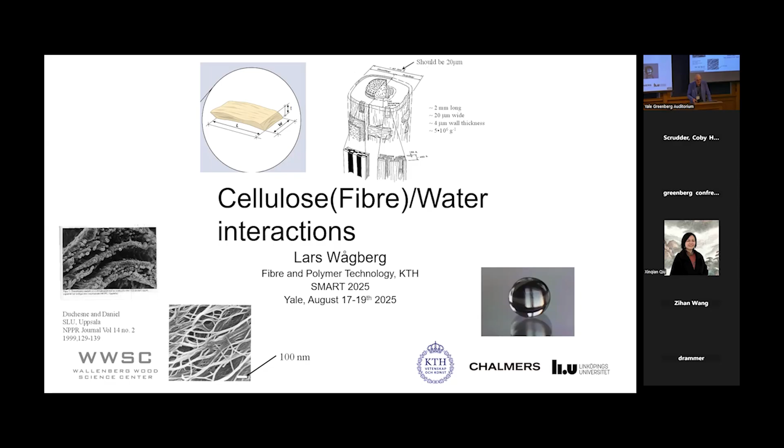And also we'll hope to spend some time on models and the swelling of model materials of cellulose. This is a regenerated cellulose bead that we have used for studies to find out what happens when you drop cellulose in water, when you immerse it in water.

So, starting with the facts that we have, the interactions are necessary for plants. Cellulose-water interactions are necessary. They are necessary for paper making, for hygiene products and absorption materials. They're negative for the strength in moist environments, both for wood and more so for papers.

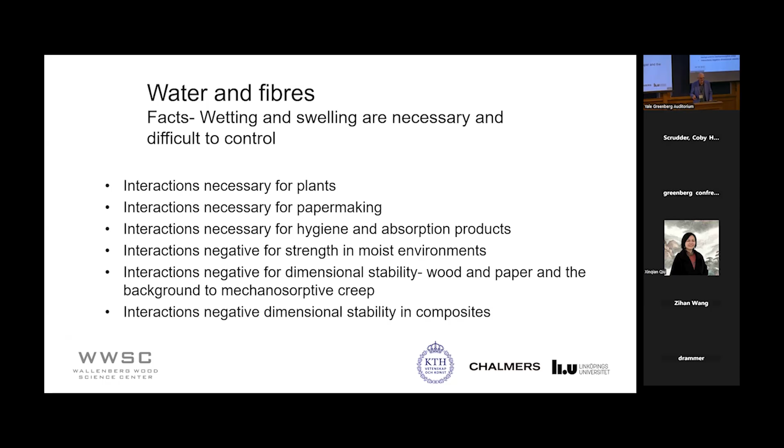Dimensional stability is a large issue. Of course, when moisture absorbs, you know that in composites that are not water resistant, they do swell and they cause a lot of problems. And dimensional stability is also another problem of the water. So the water is there, water is important, and the interaction is really important.

And the form of water is important. So are we talking about vaporized water, or are we talking about water in the condensed state? It's a very big difference. So this will be a combination of lecturing, and I hope you can take that. It's well meant, and it's also giving some own results.

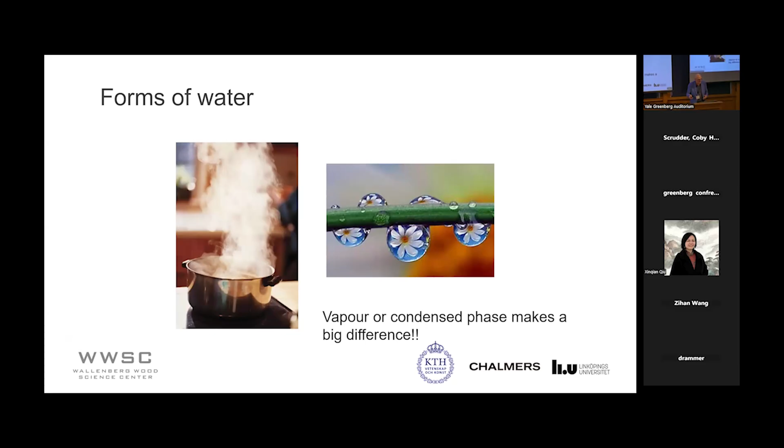But let's start by lecturing, and that is the driving forces behind moisture adsorption to cellulose and fibers. People might find this as an academic battle, but it's not. It's a fundamentals that is important.

And then factors controlling the swelling of cellulose when you drop it in water. And then also the state of water at the cellulose-water interface, some modeling work by others and some high-resolution measurements that we have done ourselves. And then what happens if you remove the last water from the cellulose?

These two last bullets have been catching our attention lately because they are important. The last layers are important, and they mean a lot for the properties of the materials that we have.

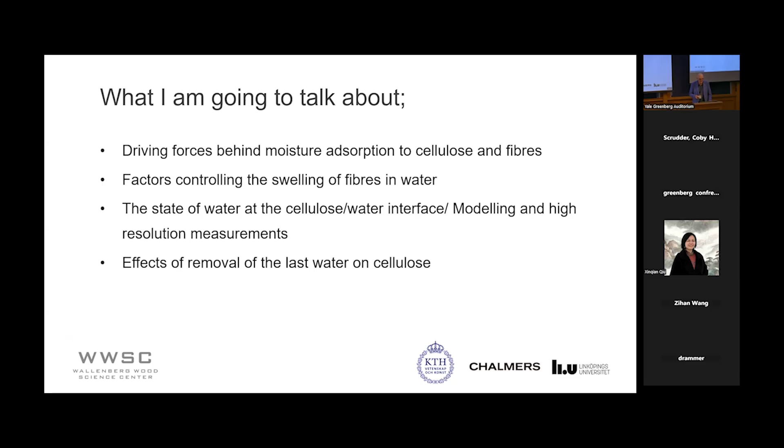So why and how does water adsorb? Well, let's start by saying that it's an enthalpy gain that is a driving force, nothing else. It's the enthalpy gain when moisture absorbs to cellulose or to wood. And how can you study this? Well, it's the free energy of the interaction. You have the enthalpy and the entropy.

And of course, when water molecules are leaving the gas phase and depositing on the surface, they are releasing the heat of evaporation, and they're having the interaction enthalpy with the surface. Of course, they lose entropy. They're much more joyful to be out here than to sitting next to each other at the surface. So you lose entropy. And this has been studied over the years.

Professor Ishimaru mentioned that we had both read a paper from 1952 or something by Morrison, but there is also some other recent papers by Hollenbeck that is very pedagogically written, and they combined calorimetry and moisture adsorption, and by doing this you can sort out both the enthalpy and the entropy contribution for the moisture absorption. And I can really recommend it.

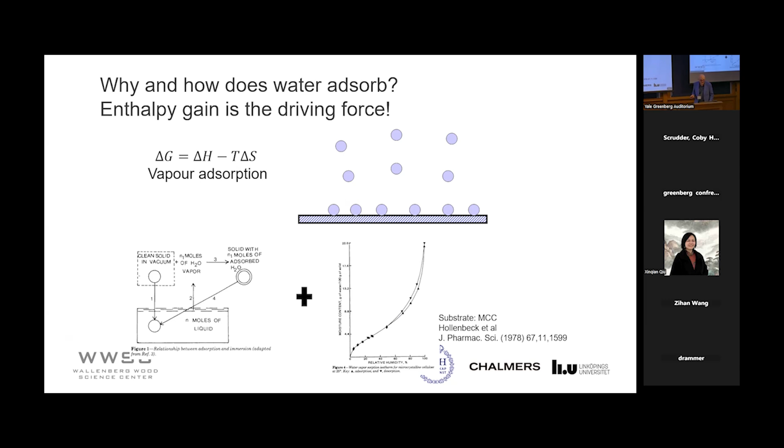It's nice reading. And what they find is that what you see here is the cumulative part at different moisture absorption, and you see that the free energy is increasing. And the initial part is steeper, the gain or the release of heat is larger in the beginning than it is at the end of the absorption isotherm. And if you look, this is the cumulative one, and this is a differential part.

So you see that up to a monolayer formation at the surface, this is from microcrystalline cellulose, there's a constant enthalpy change. And then as you pack more and more water there, you don't get as high an enthalpy change. And you also see that the entropy loss is largest in the beginning. And this is the driving force.

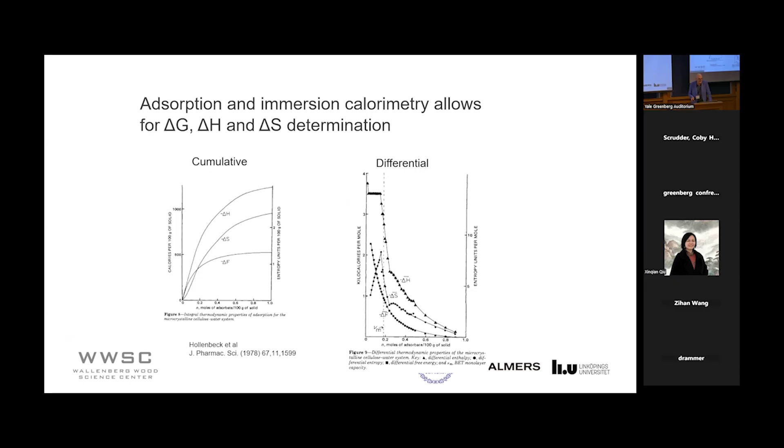So it's not the hydrogen bonding that is driving the absorption to cellulose, that's the fact. And there's also an interesting part, and that's adsorption hysteresis. It's revealed both by absorption and calorimetry. So this is the data from absorption, and this is the desorption part.

The reasons for this might be many, but their conclusion is that it's both enthalpy and entropy causes. So the material might change during the moisturizing of the cellulose, and this has been discussed by many others as well. But for the microcrystalline cellulose, the hysteresis is caused both by enthalpy and entropy upon absorption, not by swelling.

And if you have fibers instead of MCC, the situation might be a bit different. So what do we learn? Well, the enthalpy gain is the driving force for getting moisture onto cellulose. The absolute values can then be correlated to hydrogen bonding, of course, once the molecules are at the surface.

And the surfaces are uniform. It's not specific site absorption. So they do absorb at the surface, but they just absorb, and then they can find their final positions. There is no specific binding sites according to this work. And I think Morrison says the same thing. And for this reason, we don't have any swelling.

At earlier times, use of calorimetry and absorption was tiring, and you had to build special equipment. Today, we don't have that excuse. We need money to buy the equipment, but there are excellent equipment allowing us to do these measurements today. So this is, I think, important. If we modify materials, we can study these details, and we should study these details.

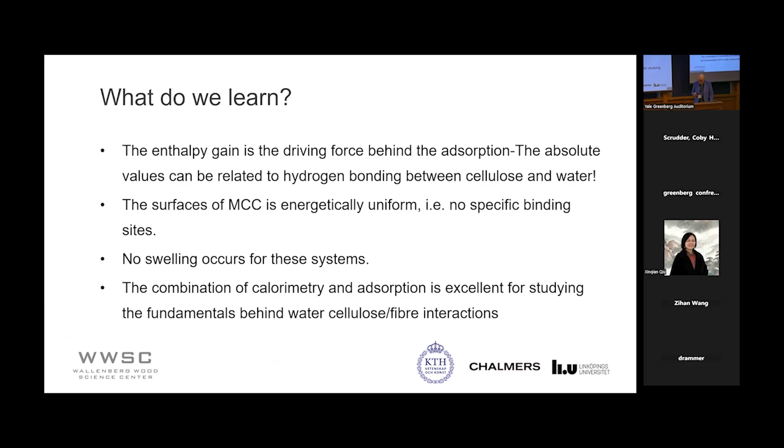So what does this mean? Well, Lars showed some images of fibril and fibril aggregates. And I also showed some data from Geoff Daniel on my initial slide. But there's also a model that has been introduced. And we're talking about fibrils and fibril aggregates. We try to teach that. We don't have protofibrils and microfibrils and so on, but we have fibril aggregates.

But if you say that we have fibrils that are 4 by 4 nanometers and all the surfaces are available, you can calculate the specific surface area for a cellulose material, and that would be for pure cellulose around 667 square meters per gram. And if you then assume a monolayer coverage of water molecules, you end up with 0.33 grams of water per gram of cellulose, which is amazing.

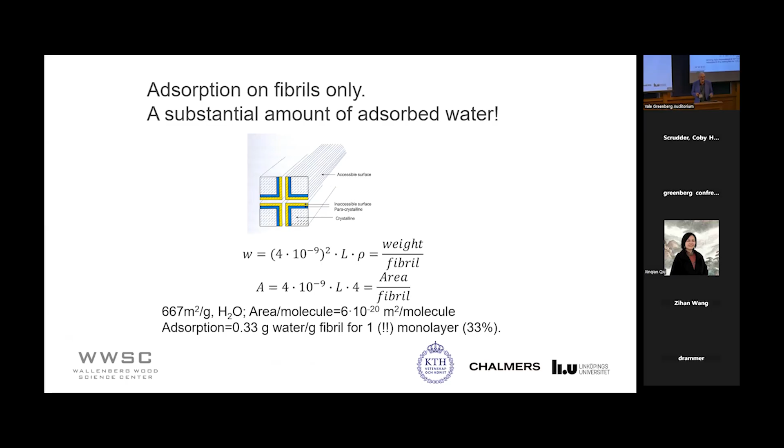And then that covers the surface. I don't use any close packing or something like that. So this is what it brings to, and just a monolayer leads to this amount of water. This is the back of the envelope calculation, of course.

And then we say that what is driving the swelling here is the pure polyelectrolyte type of swelling. So we have the free energy of swelling as the combination of the mixing term with water and cellulose, the influence by ions, and then you have the withholding forces by the network in the fiber structure. So how can we determine this?

Well, for fibers, it's a nightmare, of course. There are so many fibers, a couple of million fibers per gram in the lignified wood, and also they are basically all different.

So what we have done is that we have developed a method where we regenerate cellulose. We take fibers that we have carefully characterized and modified, we dissolve them, and we precipitate them under controlled conditions, and we get these astonishing beads, which I'm very happy about. I looked for this kind of material for 10 years, and now we found that we can use cellulose to get these beads.

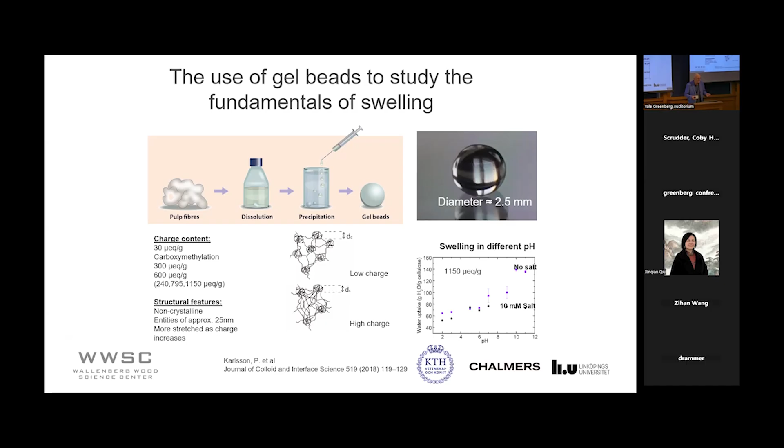We have looked at the swelling, and we see that the swelling follows: when you increase the pH, you are dissociating the carboxyl groups, and you get an increase in swelling. It behaves basically as fibers do, but exaggerated, because fibers don't swell this much.

And then we have these three terms: the mixing term, the ion term, and the deformation term. The ion term is rather easy. We know the charges, and we can estimate them from a simple osmotic pressure calculation like this.

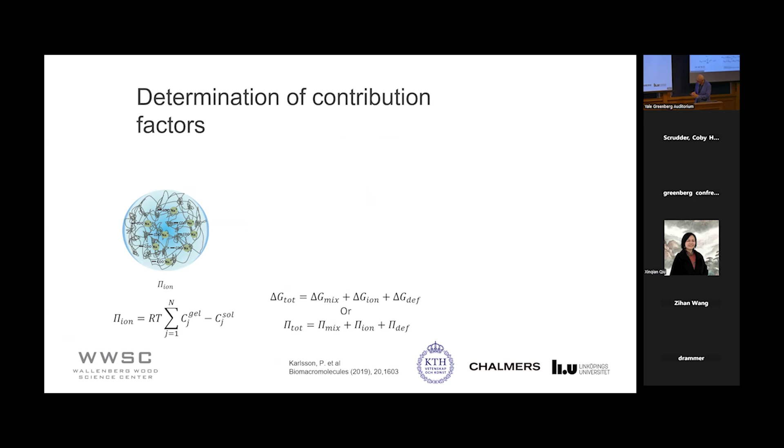Then we use Flory-Huggins theory to estimate the mixing term, where we naturally have the interaction term, the chi parameter, and phi is the volume fraction. Then we have the network term holding these materials together, as in the fiber wall.

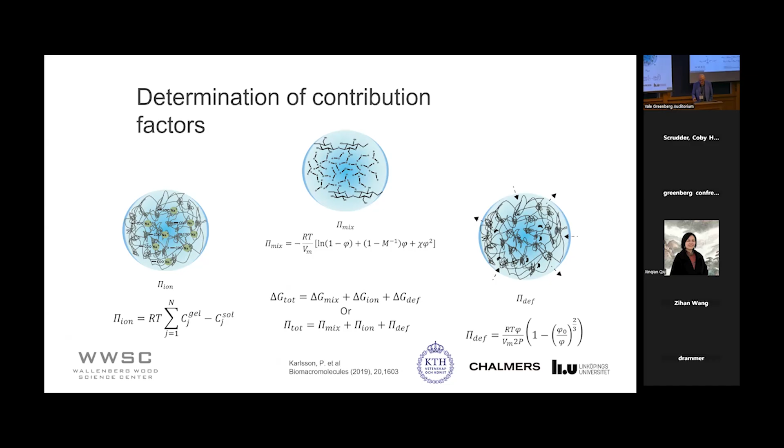But this is, of course, very difficult. So how we solve the problem is by estimating the chi parameter from Flory-Huggins theory, theoretically, and then we determine the influence of charges to get the ionic term. Then we determine the swelling under different osmotic stresses, which means we put polymers outside the bead and see how they deswell. So then we have three known, and just the network term left, which we can calculate.

There you see we have the influence of the different volume fractions here. We see that the mixing term, as you increase the volume fraction of cellulose, becomes more important, and then you have the deformation term. The ionic term turns out to be much more important at lower volume fractions.

Is this important for fibers? Is this something that shows for fibers? Well, I've added the term here. This is how much a fiber swells, the lignified fiber in water. And you see that yes, all these terms can play a big role in the swelling of fibers when you dump them into water.

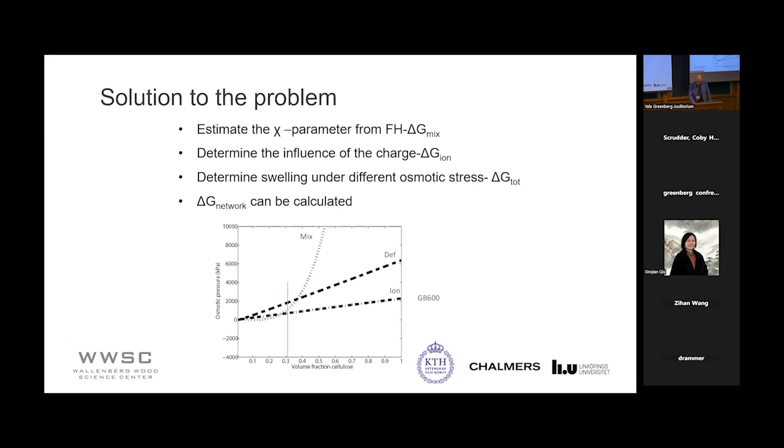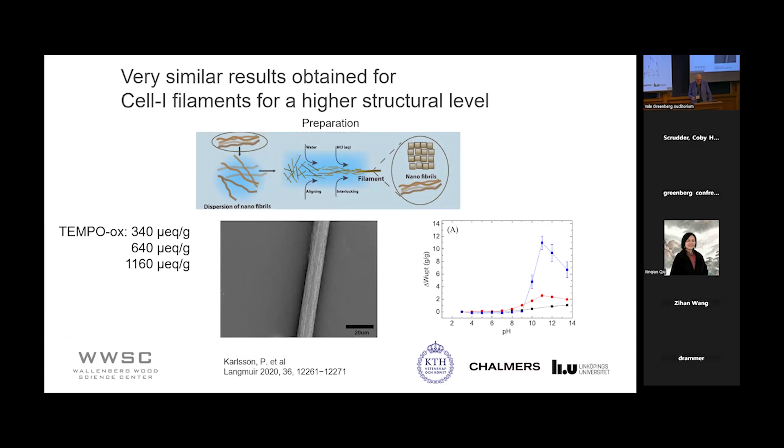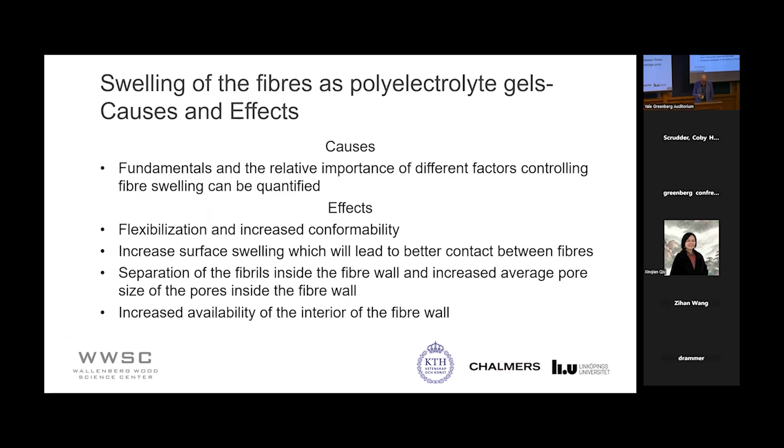Then there's the state of the water around fibers in the fiber wall, and that has been a question for many years. So how is the mobility of the water molecules affected in the fiber wall? I wanted to highlight a number of studies - here's where the water is.

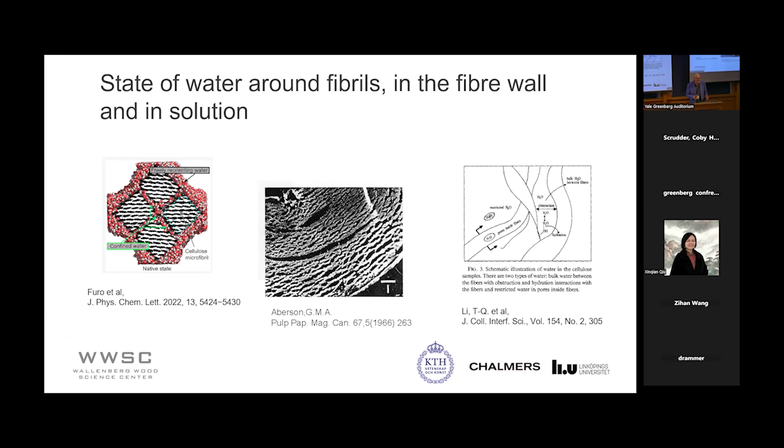Lars Ödberg and Tie-Qiang Li used relaxation NMR to see how water molecules relax - whether they are on the surface, a bit from the surface, or in the bulk - and how the movements change. Lars Berglund, together with Istvan Furó and Jakob Wohlert, also did modeling of water around a fibril bundle like this, the fibril aggregate, where you have internal surfaces and external water. What we can learn from the work by Tie-Qiang Li and Lars Ödberg is that you have different kinds of relaxation times.

The tau F is the relaxation time of adsorbed water. The tau S is the relaxation time of water molecules diffusing between fibrils. And then the free relaxation time of water at 25 degrees Celsius is 2.4 picoseconds.

So you see that the adsorbed water has decreased relaxation, or they are relaxing slower. And you also see that the water molecules hindered from diffusing inside the fiber wall are really slow. We're talking about nanoseconds and picoseconds.

And they also found, which is important, that there are 1 to 2 layers of water that are affected by the surface.

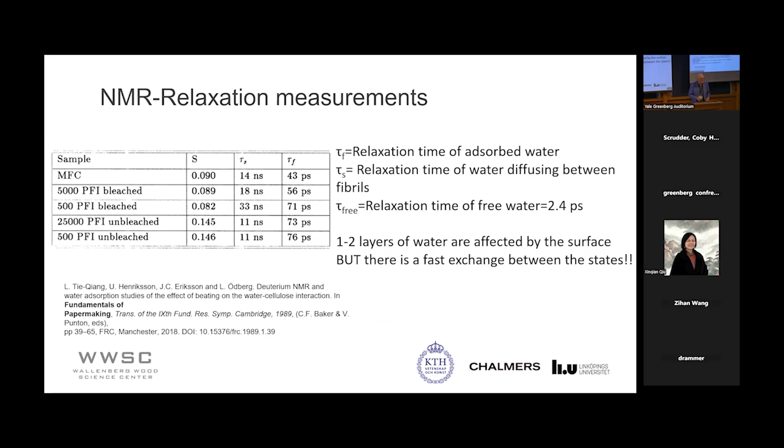This work by Lars and Istvan is really enlightening, because they also modeled this with molecular dynamic simulations, and they see that in this fibril aggregate you have availability for water molecules, but there are very tiny adsorbed layers, and then free water molecules outside, with a quick exchange between these layers.

So there is a change in movement of the water molecules tied close to the cellulose surface, and also a fast exchange between these different states. Otherwise, they would show up in scattering, for instance. So they are changing fast, they are slower, but they are exchanging.

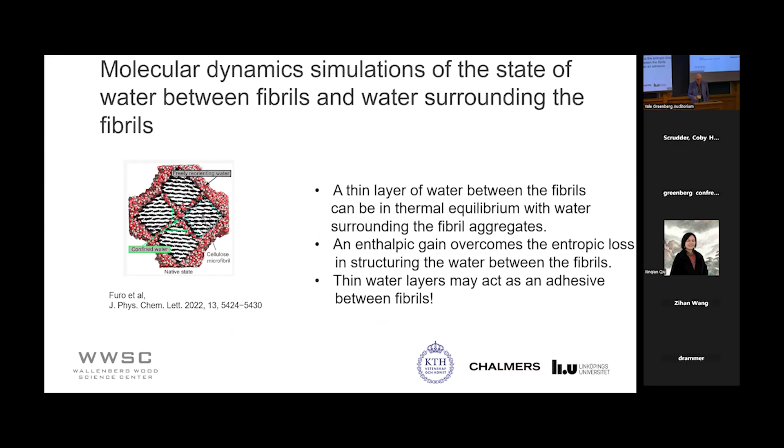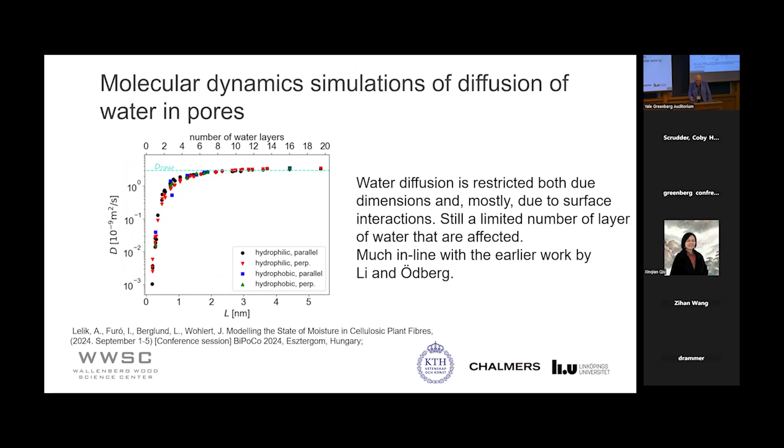This has also been shown recently by Jakob and his PhD student Alice Lelik. They see a change in mobility—this is on a logarithmic scale—a change of mobility inside a pore like this, and you also see the number of water layers outside. So the conclusion is much in line with the earlier work by Ödberg and Tie-Qiang Li, but it also shows the power of this kind of modeling when you're asking the right questions.

Lately, the drying of water molecules from the surface has also been studied by Igor Zozoulenko and his group, together with Lennart Bergstrom at Stockholm University. They have been checking how easy it is to remove water molecules from fibril or fibril aggregates, fibril bundles, when decreasing the pressure outside.

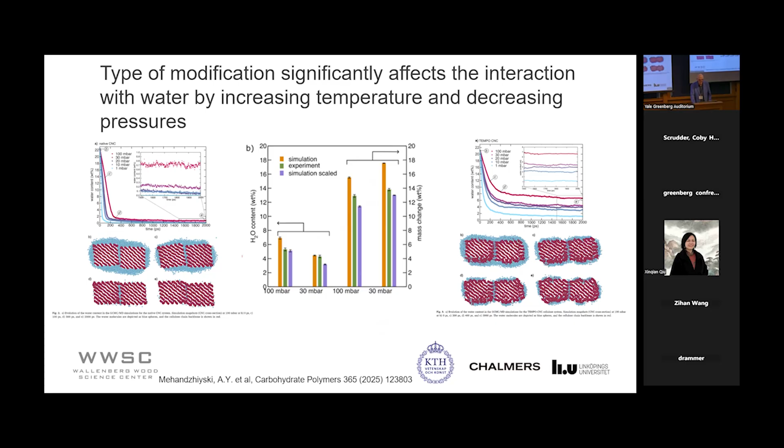You see that for non-modified, or for these sulfonated fibrils, you can remove basically all the water. But for tempo oxidized fibrils, it's very difficult to remove the last water. So the type of modification will also influence how tightly these molecules sit at the interface.

So very quickly, I'd like to show you what happens when removing the last water. This is from cellulose nanofibril sheets—we make sheets from nanofibrils, dry them, and then change them to different counter ions, since these are charged and contain carboxyl groups. Then we heat them for different times and check their reswelling.

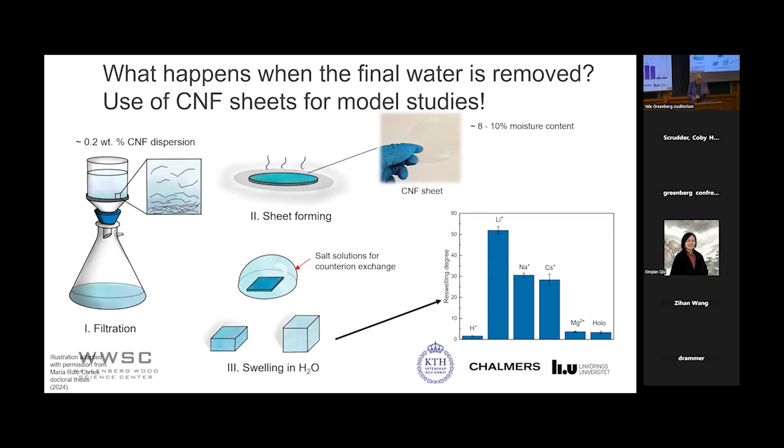We measure the reswelling as a function of the counter ion content, and we see that monovalent ions and multivalent ions play a very big role. Holocellulose is also something from Lars Berglund's group—we show that these are not modified, but they don't hornify to the same extent as others.

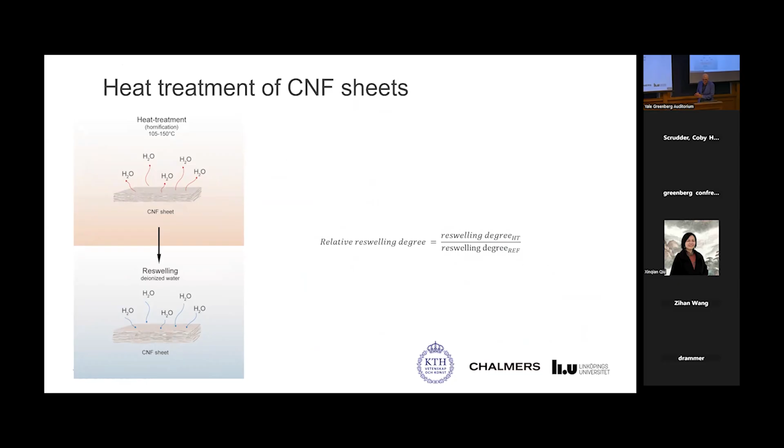So this is what we do, a more schematic treatment, and then we measure the reswelling degree. Then we see, when we heat treat—this is the message.

So when we heat treat the sheets from 105 to 150 degrees, the swelling decreases, and there's a limit around 130 degrees. After 130 degrees, we see a rapid decrease in reswelling, and also the counter ions play a big role.

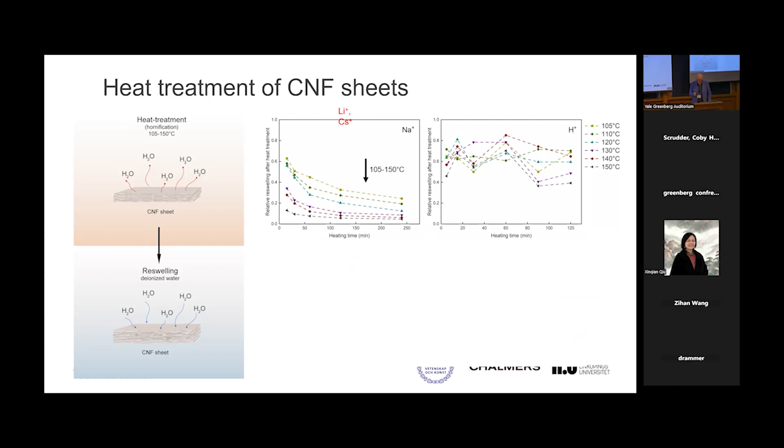But I'll rush through this a bit. If you dry it in the protonated form, we don't see the big influence of the heat treatment, but we do see a hornification when we put them down in water again. So I'll skip a couple of slides and move on.

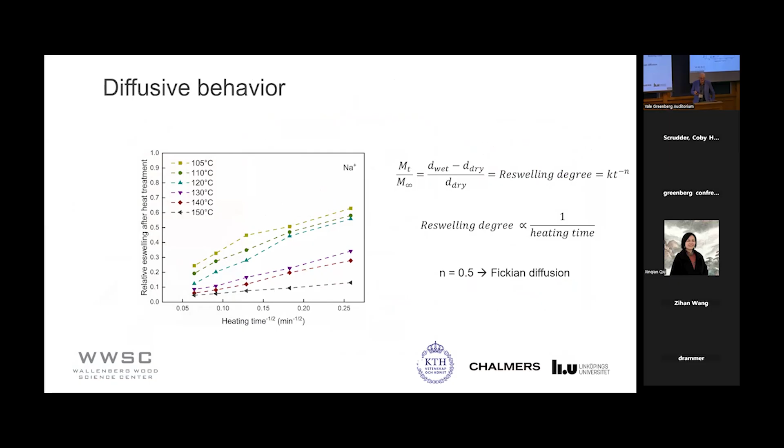Our hypothesis was that this seems like a diffusive process, a diffusive behavior. So we plotted the relative swelling after heat treatment as a function of heating time to the 1 over the heating time, and we get a rather straight line. So it is some kind of diffusive behavior, but we don't know exactly what is diffusing. Our hypothesis is that it could be both molecules on the surface and water, but we haven't been able to separate this.

But this was an important conclusion: if we heat treat the fibrous sheets in the proton form for different times, these are wet properties of wet sheets. You see that they have a wet strength around 50 megapascals if you heat treat them. So if you heat treat them and drop them in water, they are really, really strong still.

If you then change them from the protonated form to the sodium form, of course they lose most of it. So what we see with the hornification is that we take the last number of water molecules out, we bring the surfaces together, they get tightly bonded to each other, and when a water molecule has to penetrate into this, it takes a lot of time.

So we call it a kinetically locked state. And then what the interactions are at this interface is still under debate. But we think that don't forget the van der Waals interactions, because they are non-specific and have a rather high range compared to hydrogen bonds.

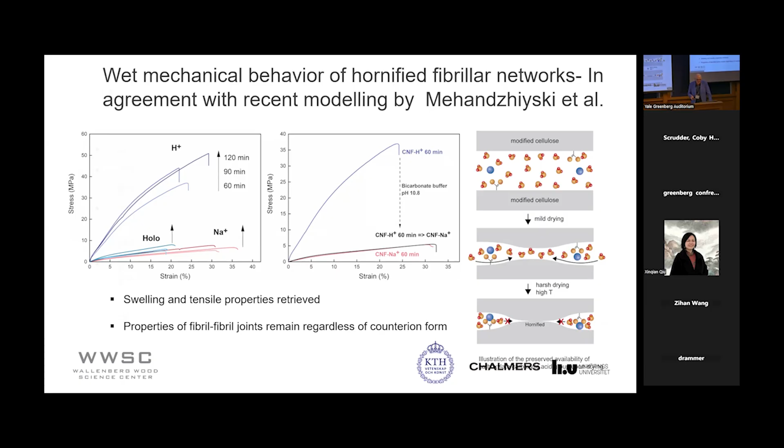So what do we learn from these results? Well, we say that a few water layers strongly associate with the cellulose surface. They have a slower diffusion compared to free water, but there is a fast exchange between the states. They are probably essential both when the tree is synthesizing the cellulose for the fibers to orient in the right way, and they also have an enormous effect on the mechanical properties of both wood, I would say, and fibril-based materials.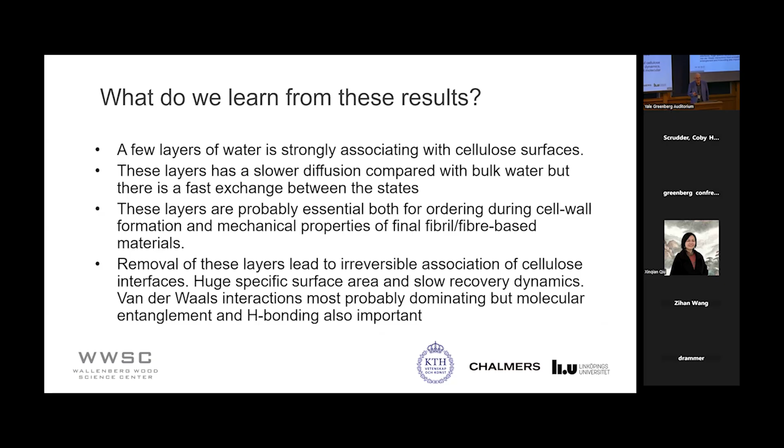You remove these last layers, you have an irreversible association, basically irreversible. They can't reswell. So the take-home conclusions and the final remarks are that...

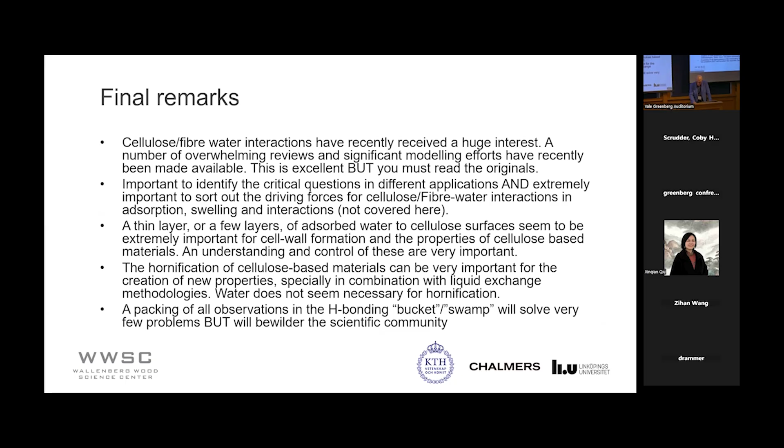And the packing of all that into the last bullet—everybody who knows me knows that this is kind of not a religious conviction, but also a straightening up of the discussion. If you dump all your explanations into the hydrogen bonding bucket or swamp, you will solve very few problems, but you will bewilder the scientific community. But hydrogen bonds are there, no doubt about it, no doubt about it.